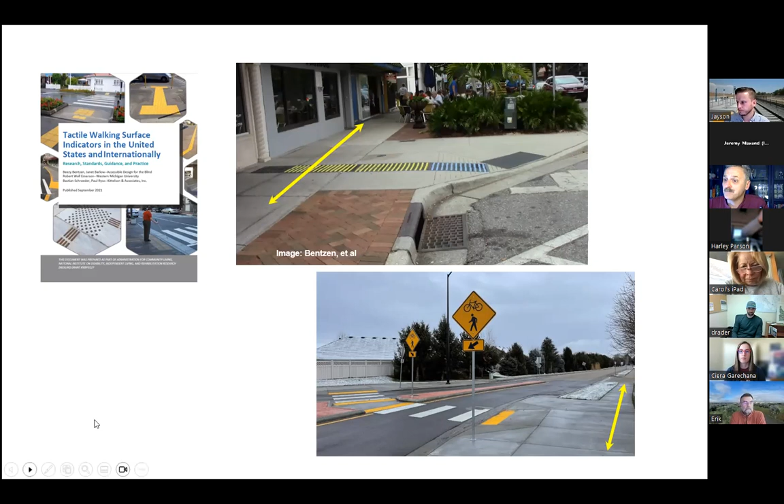Another example is in the application of diagonal curb ramps, where the truncated domes do not provide directionality and can orient people toward the middle of the intersection. And while these are meant to be a last resort application, they do exist for lots of reasons. As you can see, the application on the right in this example is orienting the bar tile so someone can stand on there and sense which direction they are to walk, instead of perhaps following a misguided cue from the truncated dome to go to the middle of the intersection.

And then finally, next slide, just all the application of NACTO and urban street design principles. There's a lot of these, including shared streets and what happened after COVID, that just simply aren't in PROWAG and the ADA standards, but we're realizing there's a need there. And this is a very recent project in the city of Boise, and thanks to the great folks at Ada County Highway District, CCDC, and the city of Boise, for putting these tactile strips out there and using them.

So if a person with a vision disability finds themselves off the sidewalk and into the bike lane, they still have a detectable cue to know when the end of that bike lane is occurring, so they don't get into traffic. So that's a little bit of where we are.

So, just trying to break it up into four different sections for you. We're going to talk about why tactile warning surface indicators are necessary, even though Don gave a pretty good intro as to why they are important. We're going to talk about the different surfaces, detectable warnings, TDIs and TWDs, and then finally just key factors to maintaining their functionality.

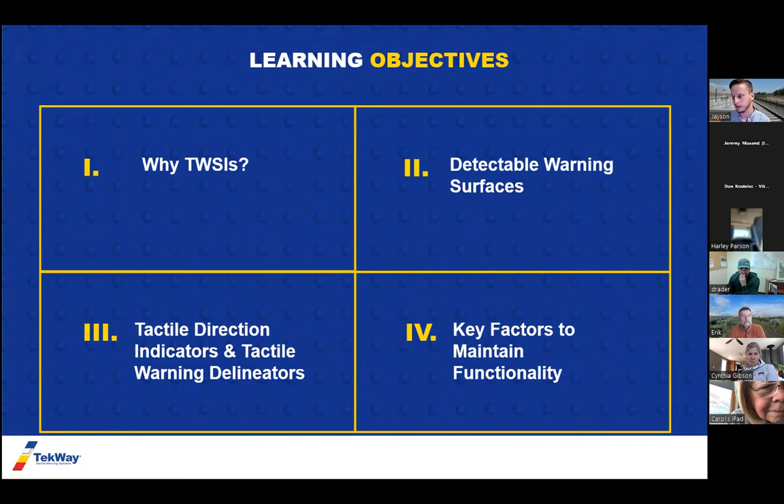So if we look at a definition given by Beezy Bentzen, and we work a lot with them - Don was mentioning Janet Barlow - it's really because of their research, due to a lot of their research, that we actually exist as a company, because of all they've done to further these applications for this group of people. And so this definition is really, have to give credit to Beezy Bentzen.

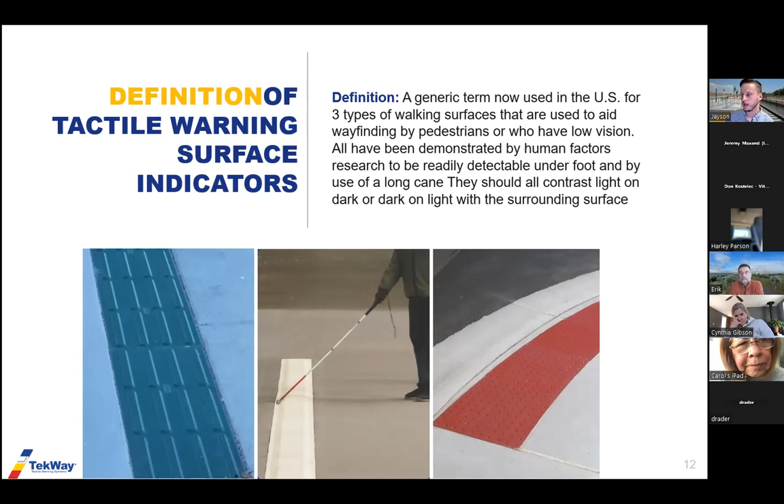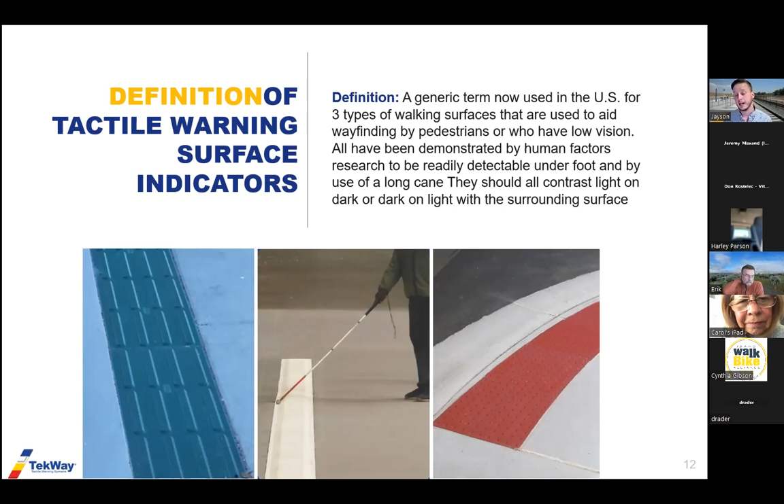So in general, TWSIs are three types of walking surfaces that are used to aid wayfinding by pedestrians who have low to no vision. They've all been researched and tested, and they have been found to be detectable and distinguishable, whether underfoot or by cane. Also importantly, they contrast in terms of color, whether it's a dark surface with a lighter sidewalk or vice versa, and not only that, but they contrast with each other.

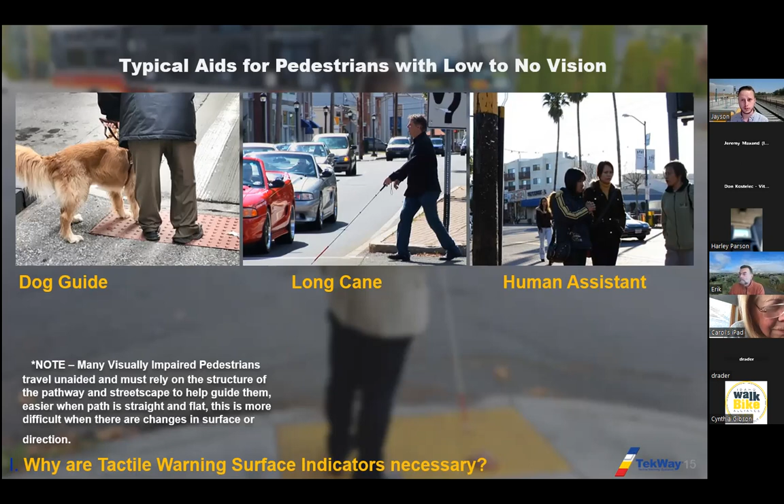A lot of pedestrians travel unaided, so they rely heavily on the structure of the street. I've heard many times that the sound of traffic acts as a borderline for someone who can't see. So if a path is straight, with a building line on one side and traffic on the other, continuously straight, that's easier to navigate. It's when you have changes of direction or surface changes that things become difficult to navigate.

When pedestrians with visual impairments are traveling, they're not always familiar with where they're going, and they often travel independently. There might be unfamiliar destinations, just like you or I going shopping in a new place, or taking our family to a different park - same rules apply. They have to navigate different streets, intersections, and crossings, and that unfamiliarity, especially when signals aren't consistent, creates potential hazards.

The general layout of the street can help sometimes, but it can also be confusing, like that roundabout that Don was showing. When things aren't clear and are also unfamiliar, something that hasn't been traversed before, that creates a potential hazard.

When we're talking about creating tactile warning surface indicators for these pedestrians, TekWay in particular goes by two standards from the ADA. Number one, Title II, talking about how we shouldn't discriminate against anybody that has a disability. We take that a step further to mean this needs to be in operable working order, and it needs to be focused on the highest level of accessibility possible to not discriminate against these people, so they have an equal chance to traverse safely.

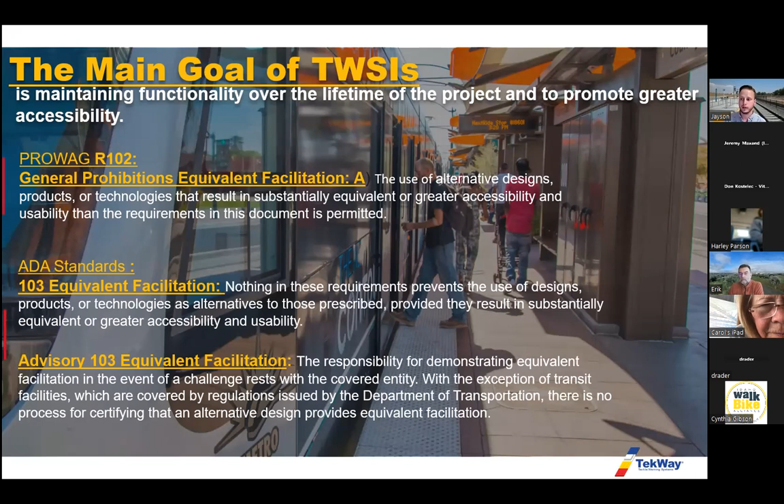All of these things are telling us that we, in whatever local community we are in, have the responsibility to go for greater accessibility.

When we're talking about tactile warning surface indicators, it's not just anything. We can't just look at something and say, hey, that surface is different from that surface. It must be sufficient enough to be a detectable warning or tactile direction indicator, because a lot of these surfaces, when felt underfoot or by cane, actually feel the same.

When we're talking about all this, it's almost like you need to be able to speak Spanish when English is the mainstream. It's a whole different language when we're talking about tactile warning surface indicators. It's important to realize, okay, what's the message we're sending to this person? And is that message consistent across the board? It's not just one person's opinion who may have some sort of vision impairment, and you go by that.

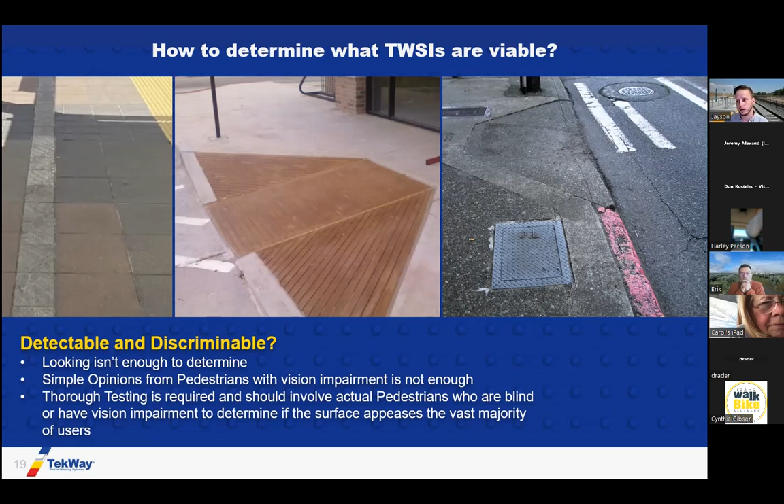It's thorough testing, making sure that across the board—and I've heard Beezy Bentzen quantify 90% as the metric—most people, most of the time, that's what we're going for. Not just one person's opinion, not just somebody saying that looks like it will work, but actually thoroughly vetting whatever you're wanting to use as a tactile warning surface indicator.

So some factors to remember for positive tactile warning surface indicators—those that have been tested and vetted: there's enough spacing between the devices, so you're not slapping them together and really confusing somebody. It's the equivalent of multiple people shouting at the same time. The raised elements are sufficient to be detectable, but not to be a hazard. And there's adequate width—we'll talk about that a little later—basically so that there's enough of the device installed that somebody doesn't step over it or miss it completely.

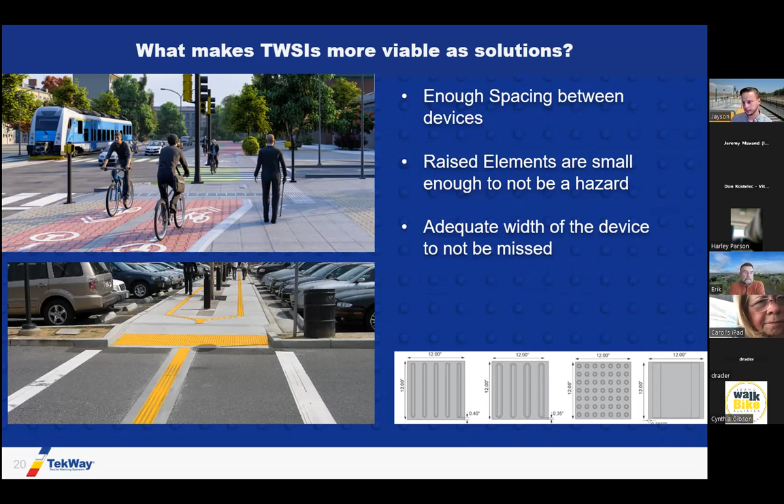When you're looking at the various tactile warning surface indicators, there are three things to remember if you're putting these down or trying to figure out what to use. Your device—making sure that what you're putting down is detectable. There are three main devices you can use, but there's not a whole lot of standards for this. So if you're thinking of experimenting or testing, make sure that whatever you're putting down is detectable and has been tested to be detectable by foot or cane.

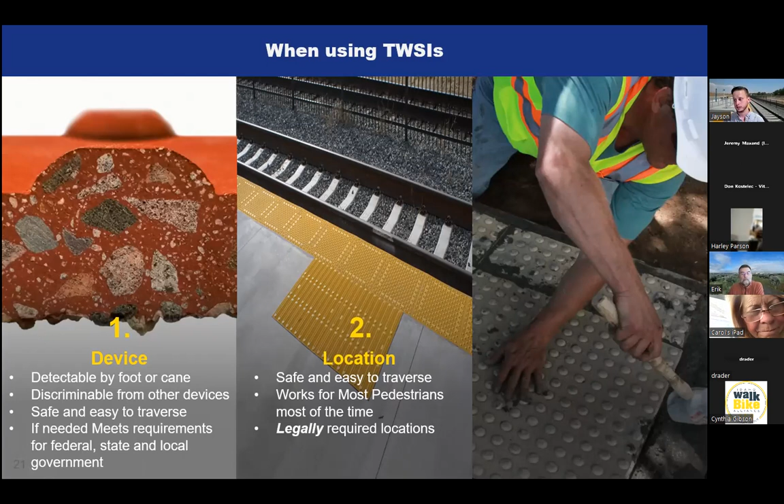It's discriminable from other devices. It's safe and easy to traverse, and if it needs to, that it meets federal, state, and local requirements. You want to make sure it's in the right location—again, safe and easy to traverse, and the legally required location. You're not putting it in the middle of an intersection where nobody's going to go, causing issues. Also make sure that whatever installation method you use ensures that however long you want it to be there, it will not deteriorate, so that it's functional and maintains an operable working condition so it will function over time.

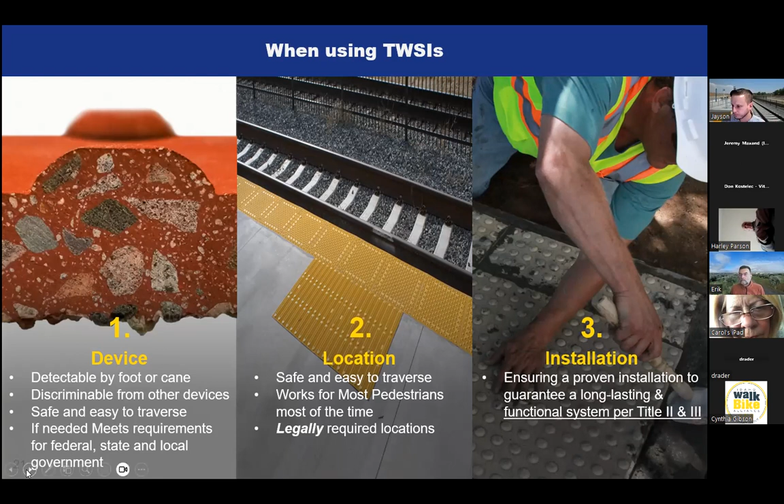So the TWSI that we're probably most familiar with, and the one that has the most standards behind it, are detectable warning surfaces.

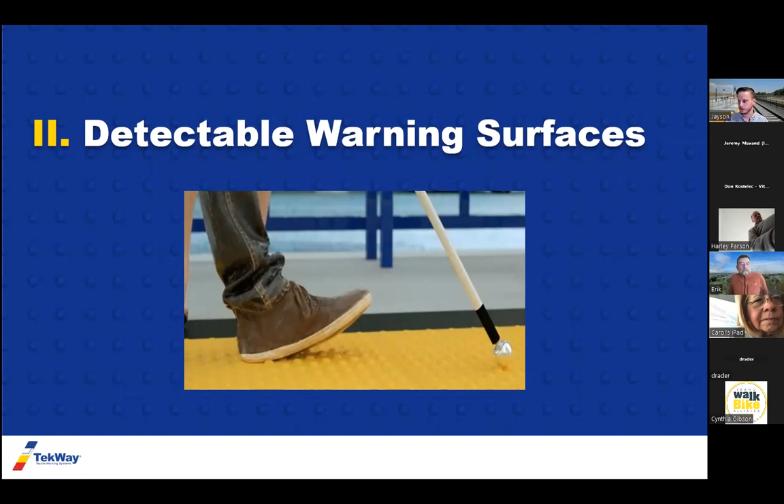A lot of these definitions are courtesy of Accessible Design for the Blind and also just general ADA standards. Detectable warnings are a standardized surface in the 2010 ADAAG, comprised of truncated domes built in or applied to walking surfaces or other elements to warn of hazards on the circulation paths. They're required by DOT at curb ramps and the edge of boarding platforms. You can actually take that a step further—they're usually required in the public right-of-way, where any walkway crosses a vehicular way.

Wherever there's a sidewalk or pedestrian walkway that will intersect or run parallel to a vehicular walkway, and there's nothing to stop it, like no curbs, no bollards, nothing to indicate a change of pathway, you need something that indicates that for people who cannot see or cannot see well.

Taking it a step further, when somebody comes across this, it's supposed to function like a stop sign. They should think, okay, there's a hazard coming up, and I should really analyze where I'm at.

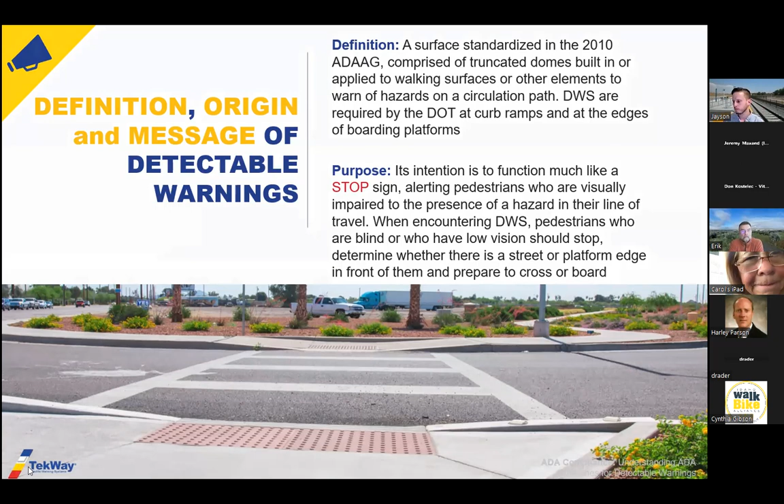Detectable warnings have the most standards behind them. This is the result of thorough testing. The ADA, Americans with Disabilities Act, came out around 1991, 1992, and it had detectable warnings in the standards, but they were actually suspended for a while to do more testing to figure out what was best for this function.

After many years of testing, in 2001 they were released again—or I should say the suspension expired, and so they started being used. In 2010, they were really standardized.

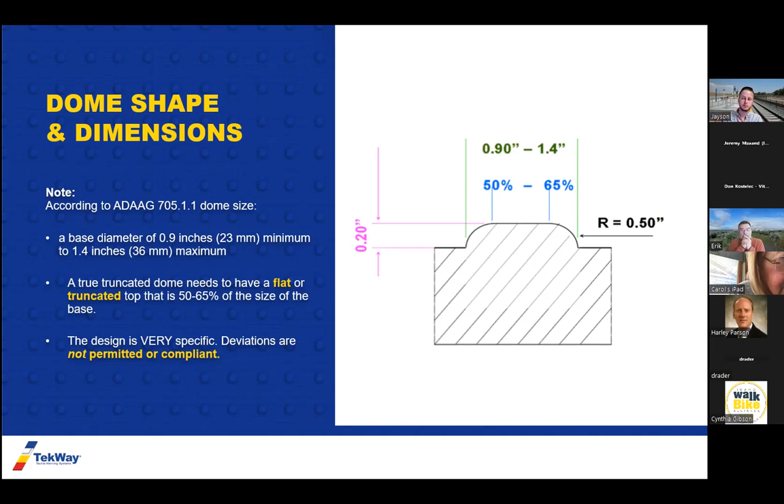The sizing and spacing of the detectable warnings is very, very specific. You've got 0.9 to 1.4 inches on the truncation, and it should be truncated on the top of that dome. It should only be 0.2 inches high, which is a pretty good metric for TWSIs—making sure it's a raised element to be detectable, but not too much to be a hazard.

More than that, you've got how far apart the domes need to be—like 1.6 spacing, center to center, dome to dome, up to 2.4. This sounds like a lot of boring regulation, but it's a result of thorough testing to ensure adequate spacing and a raised element enough to be detectable. It's important because it stops pedestrians from going out into the intersection, or at least makes them stop and orient—what's going on, where am I at this point?

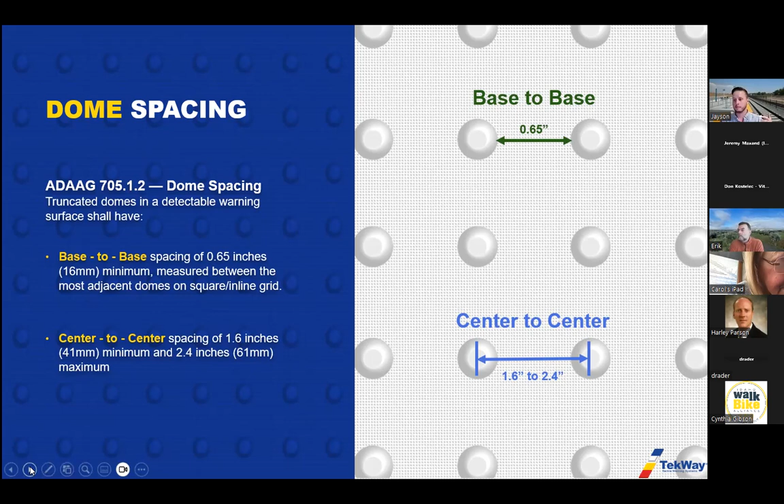Another important aspect that's federally mandated, somewhat vague, is dark on light, dark on light. General rule of thumb: you want to put a dark surface with lighter concrete, and vice versa. There were more specific standards, but it was hard to quantify those at different times of day, so the federal standards left those pretty vague.

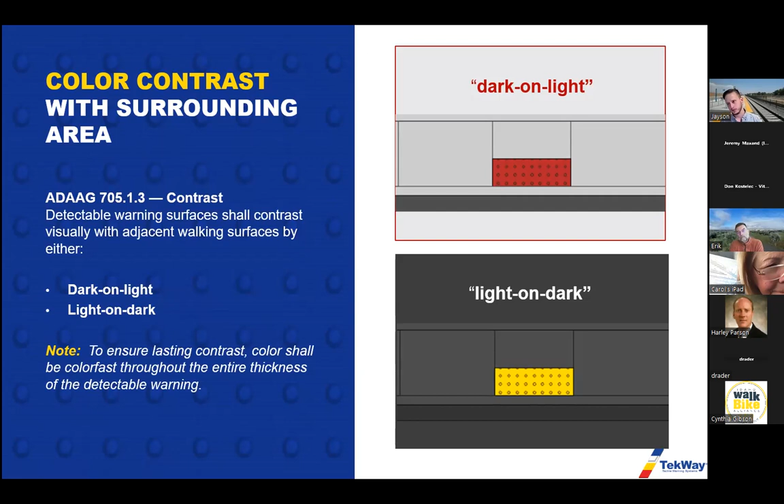Taking it a step further, California—Caltrans and the California Building Code—has a 70% contrasting ratio. If you take the actual light reflectance values of the material versus the sidewalk, you can determine that light on dark, dark on light ratio, and 70% is a pretty good metric. At different parts of the day it'll be a little different, but it's still a good benchmark to use.

Something to note: if you're using federal yellow, which is a pretty recognizable safety color, in order to ensure that contrast you probably don't want to put it on lighter concrete, or if you do, you want some sort of dark contrasting element between the material and the sidewalk. That applies to any of the applications we're talking about today—there needs to be contrast between the materials, because that's one of the last things people losing their vision will see: colors and contrast.

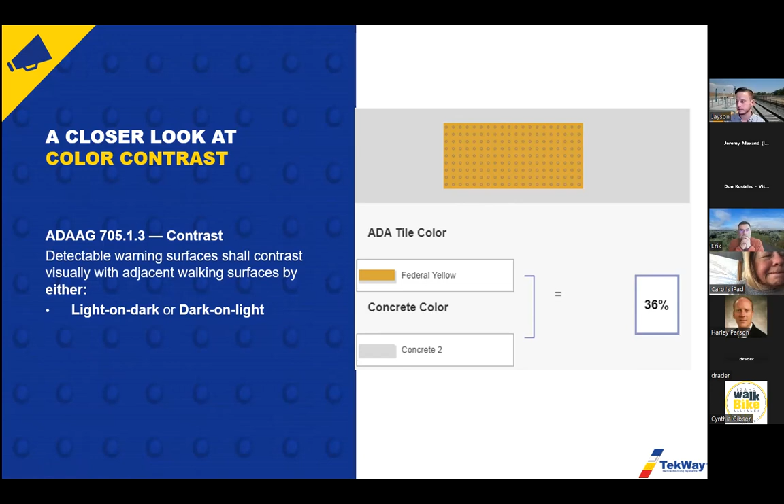You can see a difference here. With a lighter sidewalk, a federal yellow color only gets you about 36% contrast unless you do something to enhance it. Whereas a charcoal color or a dark red color will get you a much higher percentage. But you also need to think—is charcoal going to be considered like a hole? Because people can't see this very well. So color is super important when choosing what to use.

So please consider this. We also have a color contrast tool on our website you're welcome to use, or you can use your own—very important, especially if you're using multiple TWSI elements. These are just some examples of local jurisdictions using different colors, not necessarily federal yellow, that still get better contrast with the surrounding sidewalk.

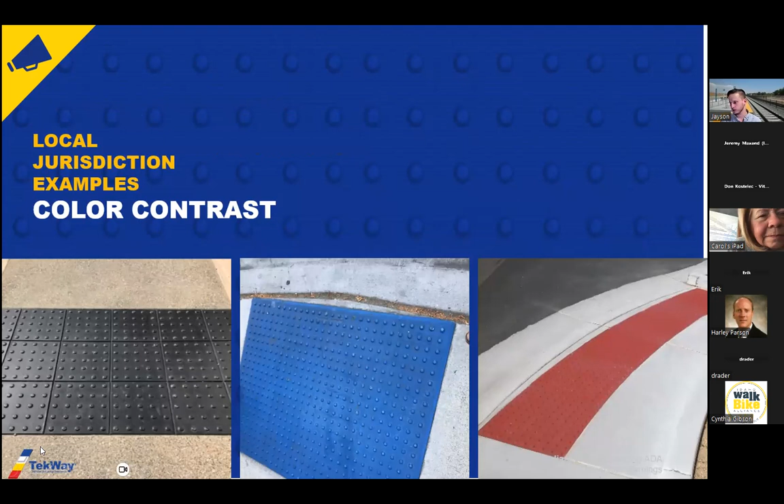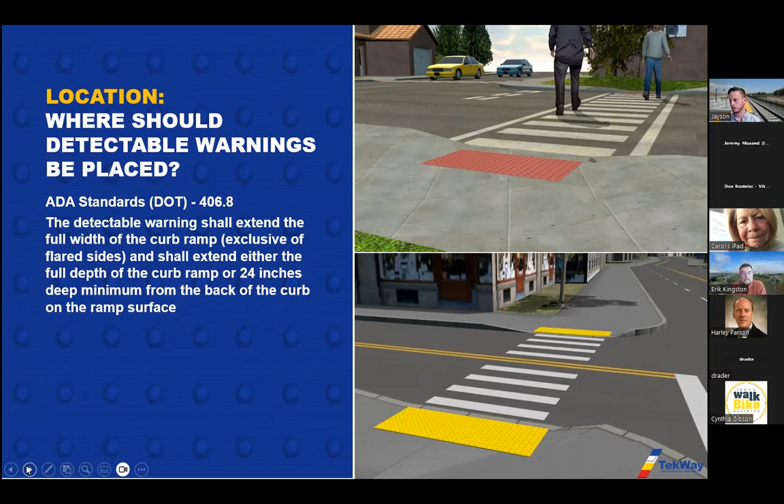We'll just keep going through these requirements because they do exist for detectable warnings. So in general, per the DOT, the detectable warnings, number one, need to extend full width of the curb ramp, but not the flared sides. And they need to be 24 inches deep in the direction of pedestrian travel. And again, that's just to make sure that they aren't missed. So 24 inches is considered the minimum acceptable depth. They can be longer than that or bigger than that, but 24 inches is the minimum when we're talking about curb ramps, or detectable warnings on these kind of surfaces, I should say.

Just more to my point earlier, there is an actual standard that says if it's not separated by some sort of element and it leads into a hazardous vehicular way, you need detectable warnings to be there. And two great examples are curb ramps, where obviously the sidewalk is becoming flush with the crosswalk, and transit platforms, where at the platform edge there's nothing to stop somebody from walking right off.

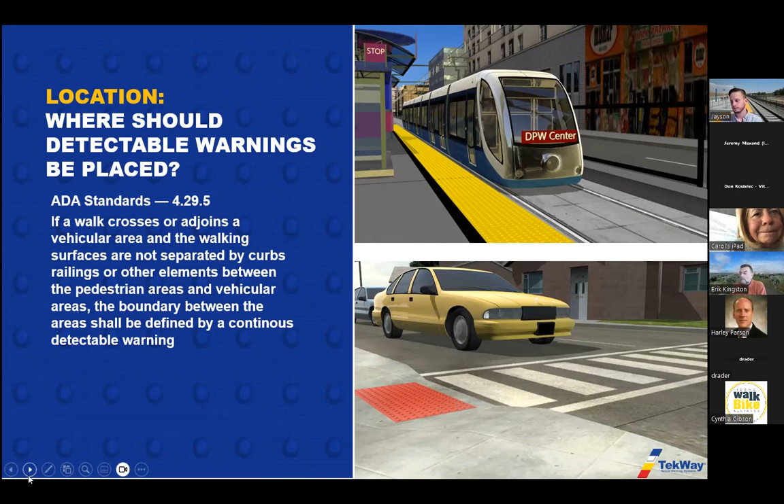So kind of like what we reviewed in those earlier standards, when it comes to color or spacing, things like that, the federal government is going to offer its minimum guidelines. Sometimes the state takes an extra step, sometimes it doesn't. Like if you're going to Texas, they mirror the federal standards. If you're going to California, they take it a lot of steps further. But it really is up to the local jurisdiction.

And a big reason for that is because of what's best in your communities: what colors are going to be best for the environment, what spacing is going to be best, say, for somebody in a wheelchair, to make a compromise for that group with the visually impaired pedestrians. So it usually rests with the local jurisdiction. Of course, if it's a state project or a federally funded project, that's a little different.

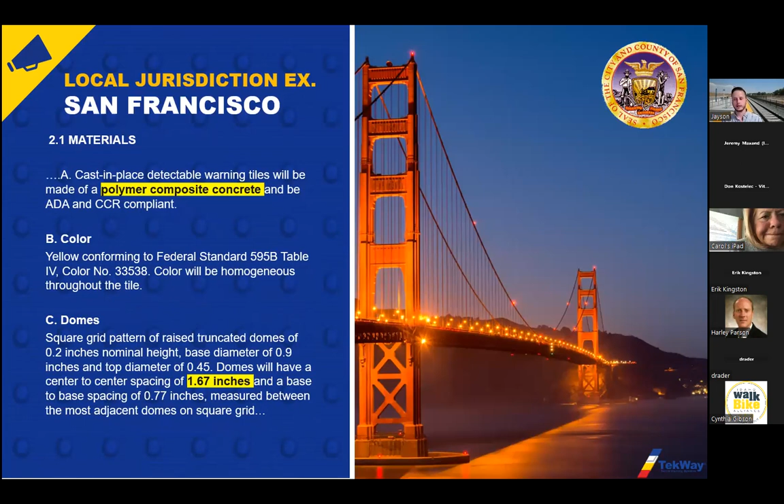An example of that is the city of San Francisco. They actually have performance specifications embedded into their projects where they talk about using a specific material, polymer composite concrete. They like to use federal yellow, but they also darken the pigments of their curb ramps to enhance that color. And Caltrans actually specifies a 1.6 to 2.4 spacing from the center of one dome to the other. They take it a step further to be 1.67, so closer together to ensure detectability.

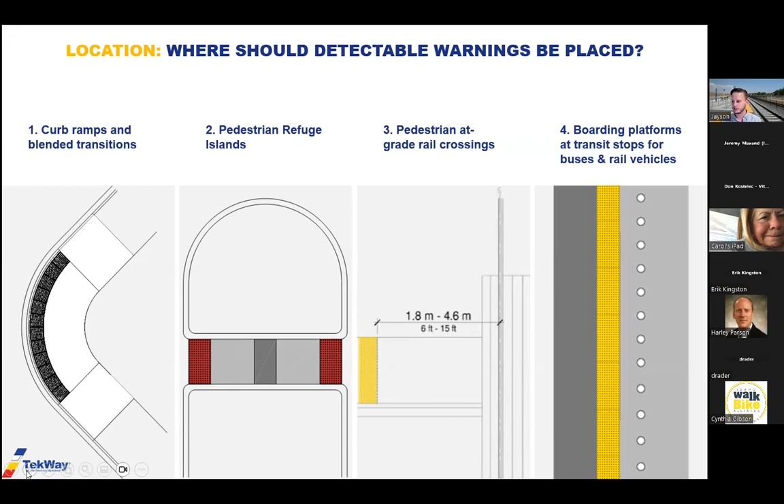These are just some examples of different places where you're going to see detectable warnings, a lot of which you're probably familiar with, like curb ramps or blended transitions, crosswalks that go across a rail line, or boarding platforms, things like that. And again, I know I'm kind of blazing through all these, so if anybody has questions, please let me know.

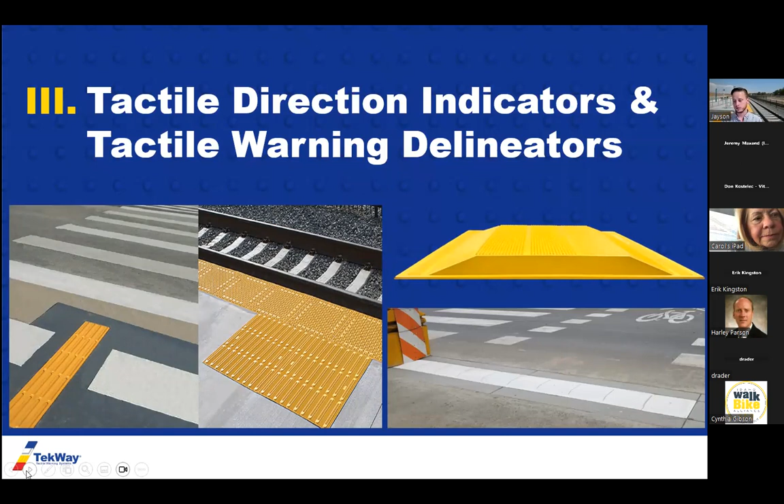Okay, so next we're going over to tactile direction indicators and tactile warning delineators. There are a lot fewer standards given for these, and in reality, there's not actually a solid federal standard. And so a lot of these things come down to the studies that have been done for them, how they've been used elsewhere, and just overall best practices.

So when we're talking about tactile direction indicators, again, courtesy of Accessible Design for the Blind, it's a surface comprised of raised, parallel, flat-top, elongated bars indicating an unobstructed path of travel where there are no natural guidelines such as edges of sidewalks, walls, or curbs, and where other directional cues such as traffic may be missing. So these are not meant to be a stop sign. They're meant to say you can continue on this safely. There's nothing to stop your path from going forward until you feel another cue or signal.

So they're really meant for aligning, like you saw with Don's picture, to make sure that you're going in the right direction, or a long-term wayfinding tool that you can follow on either side without any danger of a vehicular way coming up. So it's very important to understand that these are not meant to be a border. They're not to indicate danger. They're quite the opposite, to indicate safety. So if you proceed in this direction, you will be okay. So it's very important that that message doesn't get miscommunicated and they don't act as a border, as in if you go over this line, you're going to be in a vehicular way, because that's the wrong message.

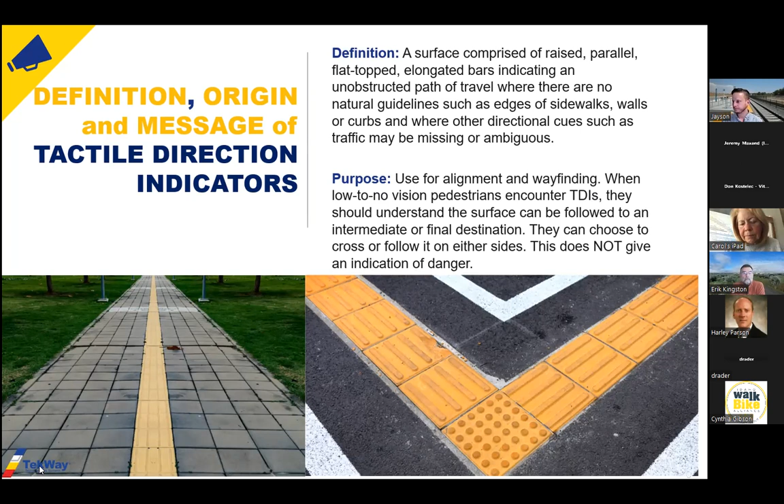Again, those bars, back to that 0.2 inches, it's not too high of an element to be a hazard, but it's enough to be detectable. And again, this is from thorough testing done not only in the US, but also in different parts of the world, and most especially in Europe and Japan, where they have used these in tandem with detectable warnings for many, many decades.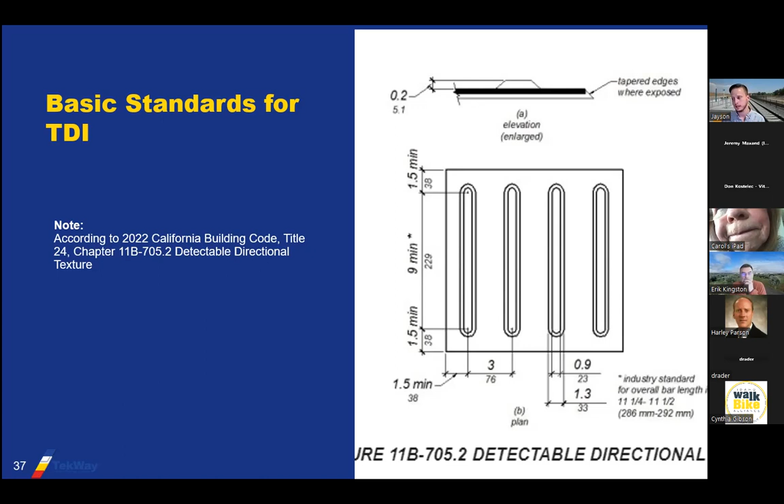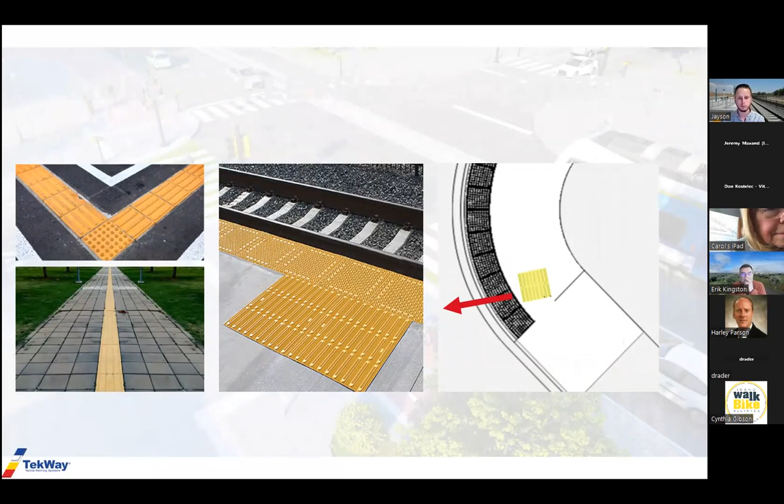So the 3 main scenarios that you'll see with tactile direction indicators are, number 1, guiding along a path as a wayfinding tool. So again, an elongated path where you're safe on both sides. You'll see them as an indicator of where to board or disembark on a vehicle, because you'll have those detectable warnings along the whole platform, but they don't necessarily indicate where you need to get on or off. So that's why on elongated transit stops, it's important to have that element so you know where the door is.

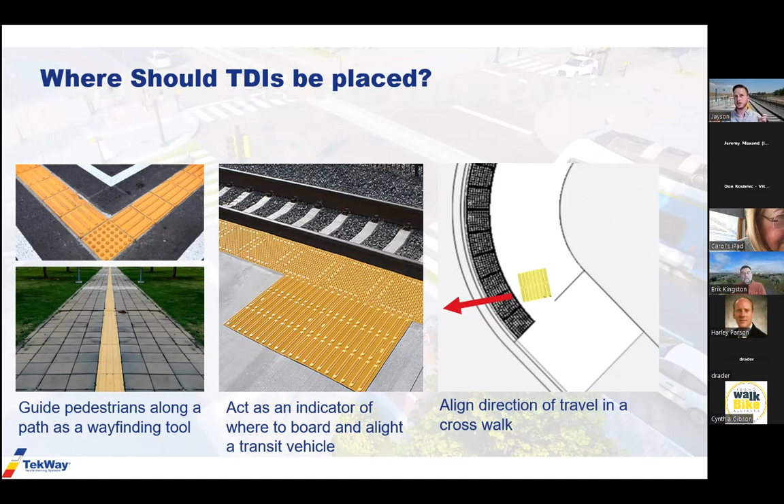Or like you saw with Don's picture, it aligns the direction of travel, because you can see on this, especially on radius installations, or just in general, detectable warnings, I have been told, are not exactly the best indicator of orientation. So, you step on a detectable warning with a bunch of those domes, it doesn't necessarily give you the best indication of what direction you're going.

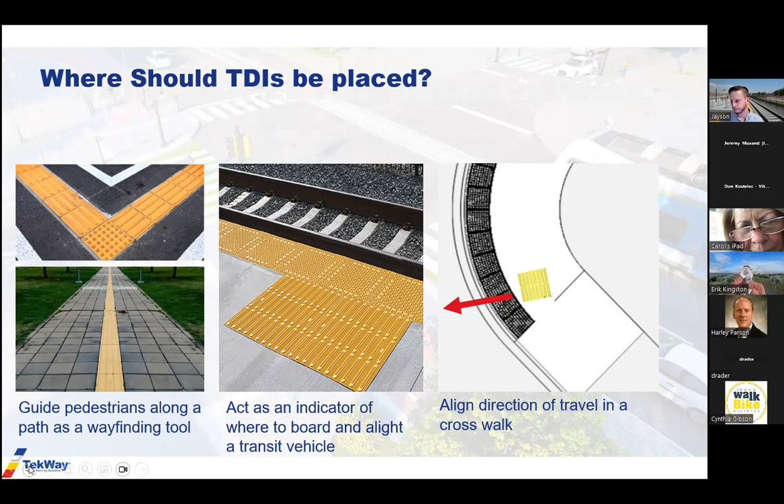So these help by offering a clear message. That's the way to cross the street. Don't go this way or this way, because we know the detectable warnings are there, but that's where you need to cross when you're not in danger. And that's just the big thing that you need to remember with these different TWSIs. Detectable warnings are a stop sign. These bars are direction indicators, or indicators of directional safety, I should say.

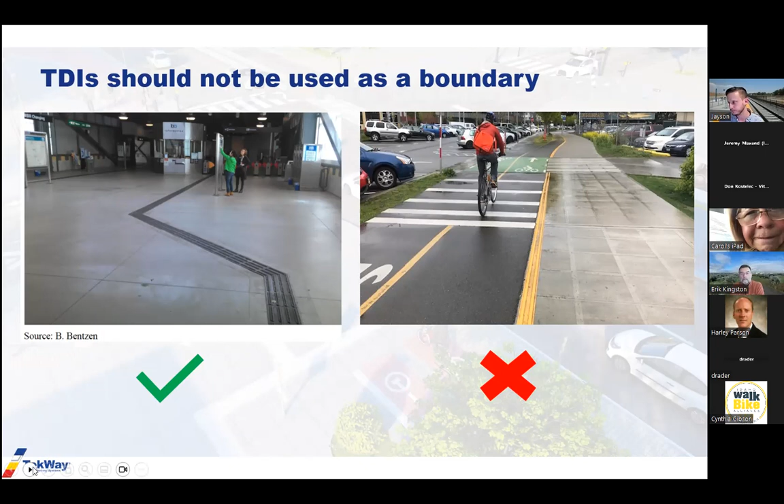Okay, so moving on, these are relatively new in the last probably 3 or 4 years, tactile warning delineators. So they're a little hard to see in these pictures, but it's this element by the bike and on the left side of this gentleman here. So it's a raised linear surface. It's a trapezoid shape as far as the cross section, and it delineates the boundary between a sidewalk and a separated bike lane. Basically where you see shared zones, either a bike path or a vehicular path on the other side.

So in contrast to the tactile direction indicators, this does act like a border. You're not necessarily supposed to cross it. It can be if needed, say if somebody in a wheelchair needs to, or a scooter or some kind of wheeled vehicle needs to get over it. But in general, it's not meant to be crossed. It is indicating that you are at the same level as a hazardous path that you're running parallel along. And the ideal situation would be when it's safe to cross, there would be another tactile signal that would indicate that.

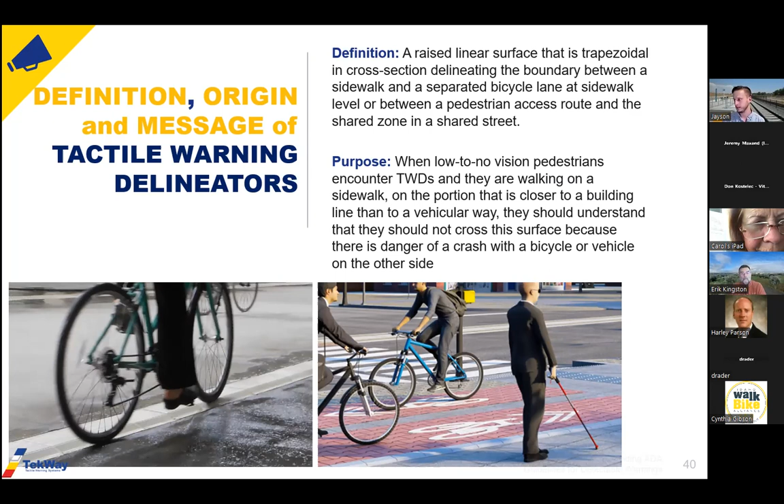So the background of these is there was a study conducted in the city and county of San Francisco, and this kind of goes back to what we were saying, like you can't just throw out TWSIs willy-nilly. They have to be studied and vetted, and they have to work for most people most of the time. So in 2019, this study was headed up by the city and county of San Francisco, really in relation to their Better Market Street project.

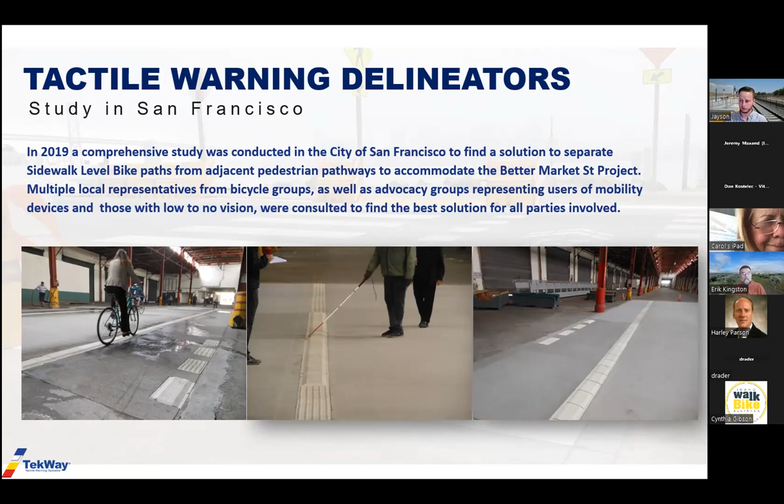A lot of local advocates were worked with on this project, including Beezy's group, the Accessible Design for the Blind, also the Lighthouse for the Blind in San Francisco, the bike groups, the mobility impaired groups. So a lot of different participants here, a good period for study. And we had the privilege of working with them on this just because we have been working with the city of San Francisco and the Lighthouse for the Blind for a long time.

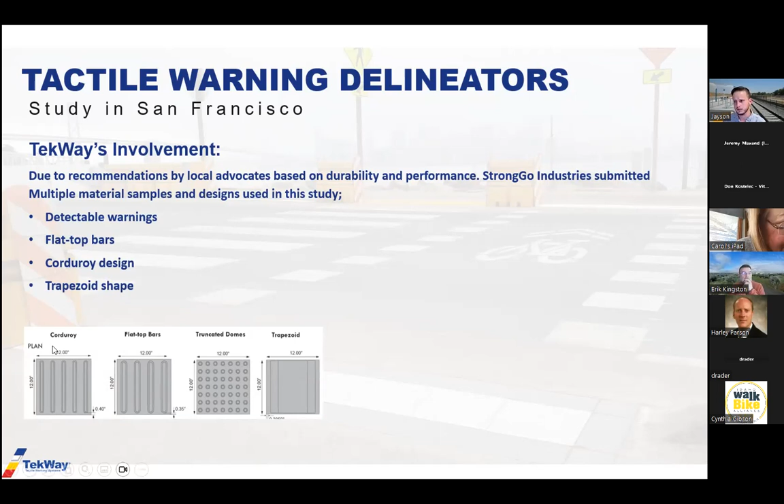And they tested 4 different surfaces to basically find a solution to what I was just saying, the bike path or the shared use path, to act as a significant border that wasn't confusing with another device. So they did test the bars that you saw before, the truncated domes, this corduroy on the left, which is a design I believe is used in Europe, and the trapezoid.

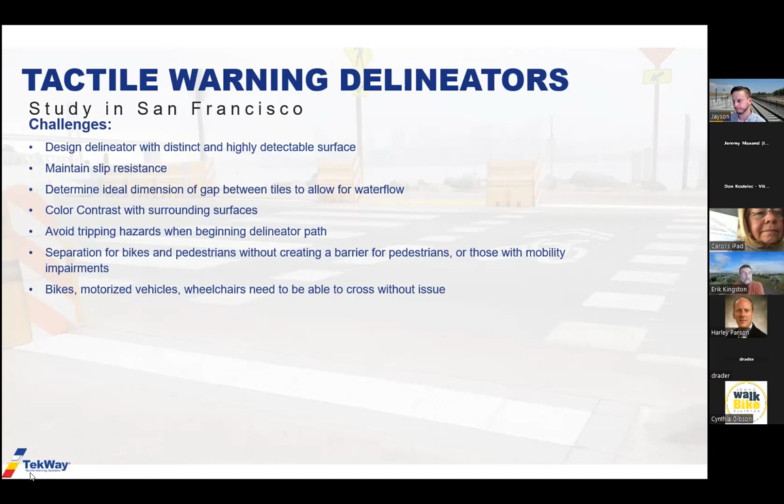So, like I said, a lot of different entities were involved, a lot of advocacy groups with different circumstances, either with guide dogs, canes, sighted assistants, and different departments from the City and County of San Francisco were consulted in this. And they needed something that was detectable, that was distinct, that still had slip resistance, that was an ideal dimension for water flow, things like that, color contrast, a robust enough separator within that limited real estate between the bike path and pedestrian path. And, like I said, wheeled vehicles had to be able to cross over it.

So they did a couple different tests. And again, the only reason I'm going over all this is to show you the level of thoroughness that is involved with using a new device for a new application. There's a lot of vetting. It can't just be done willy-nilly and just say, okay, this is a different thing, it'll work. It has to be proven.

So they did a detection test, an identification test, a following task, and a crossing task. And you can see here, there were different elements of that: detecting the surface, making sure they can identify it from different angles, following the delineators along a long path, and then also crossing over them.

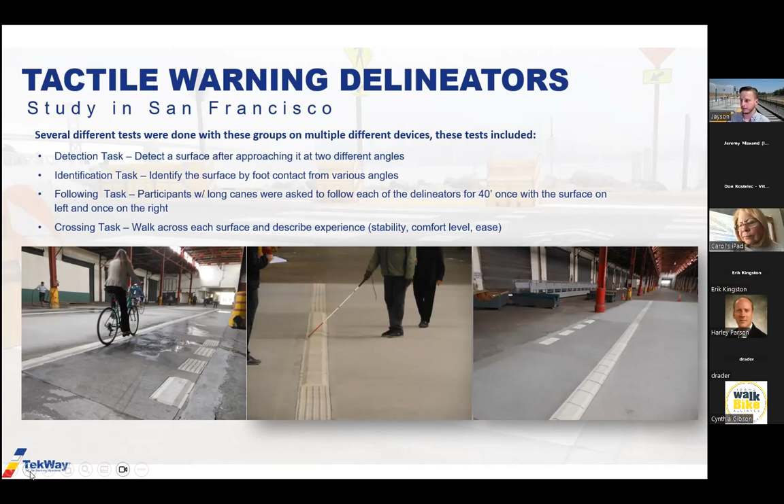So from there, the trapezoid here, and just for the sake of understanding this, oh, sorry. Go back. Right. Okay.

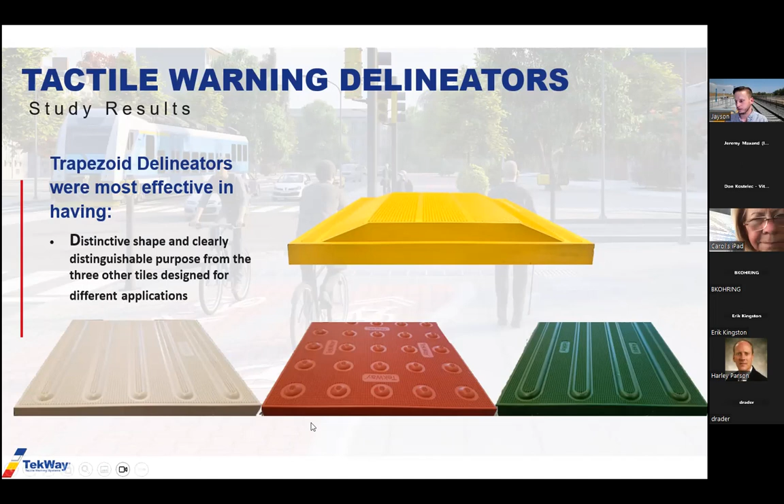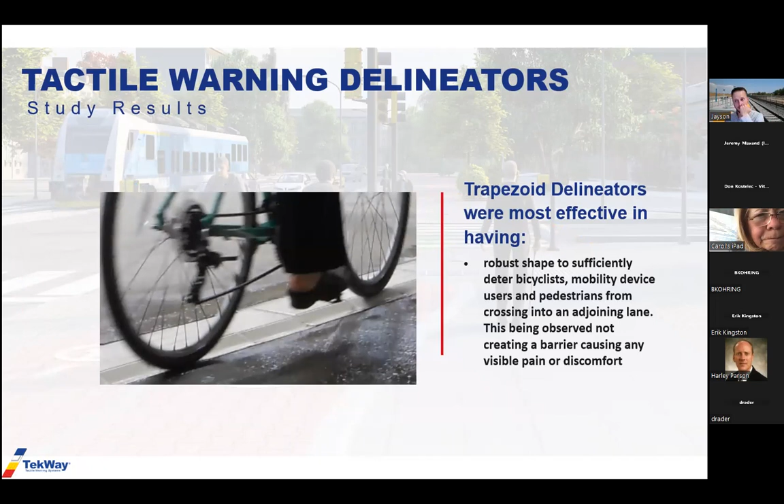For the sake of understanding the trapezoid here, you'll only see the trapezoid shape that's actually going to be above the surface. There's probably about 3/4 of an inch that's embedded in concrete. And that was the specific one that was used for San Francisco, but it was found to have a distinctive shape, different than the other devices that are used. And that shape was robust enough to act sufficiently as a border to say bikes can feel this and know not to cross over it, and vice versa, pedestrians can feel this and know not to cross over into the bike lane.

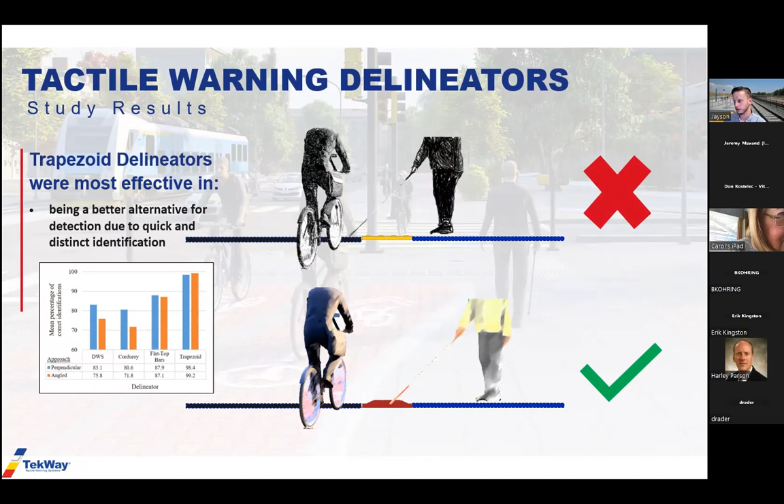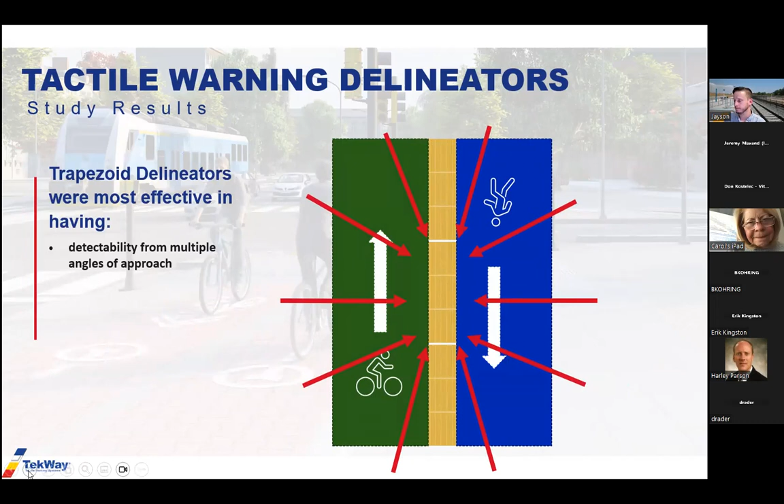Overall, they were better, and that's an actual statistic from the study that I included in there. They were better for detection, and quick detection when you're talking about 12 inches wide is very important so that you don't get cane intrusions into the bike lane, which can cause collisions or hazards. They were also found most effective in having detectability for multiple angles of approach, so different ways of coming at those delineators from different sides.

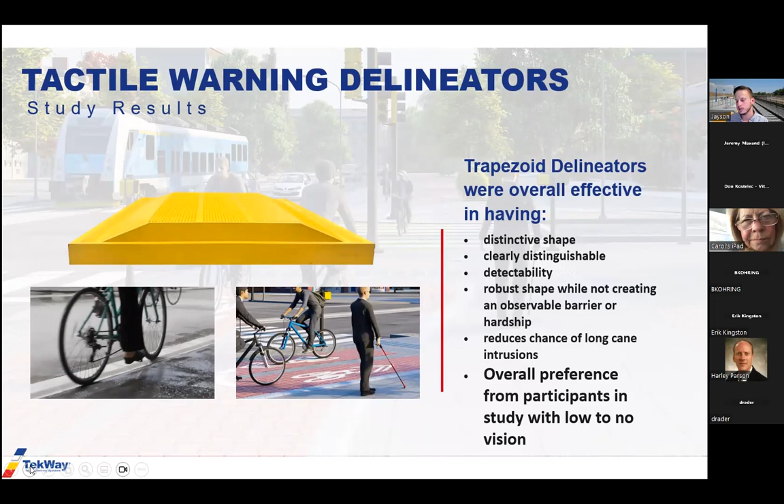And overall, among the participants that had visual impairments, the trapezoids were preferred for their distinctive shape and their detectability between all the devices, and being specifically for this purpose, that's how the trapezoids were chosen.

And these are a few more measurements for you, so you can see the finite exactness attached to a tactile warning surface indicator. These measurements are very exact, like the detectable warnings and the bars, because that's what's been proven to be detectable and distinguishable. And just like the bars and the detectable warnings, they all come in different sizes, colors, and applications. I only included the delineators here because they are a relatively new device, so you can get an idea of how they can be used, whether on a really long bike path or whether you have to break them up for streetscape elements.

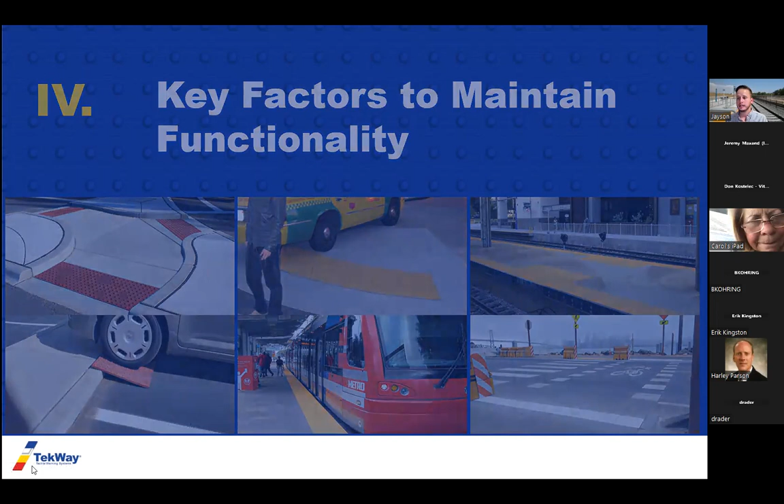Okay. So now that we've covered the different TWSIs, I wanted to talk about maintaining their functionality. Going back to the beginning when we were talking about how these need to be in operable working condition, you need to consider, when you're either working with or installing TWSIs, what are they going to have to come against to be successful? Because again, these aren't light bulbs or doorknobs or nails that you throw in at the end of a project. These are federally mandated, and if not mandated, then important for this community of pedestrians so that they can travel safely. So in order to make sure that they can be in working condition, you have to consider these critical points.

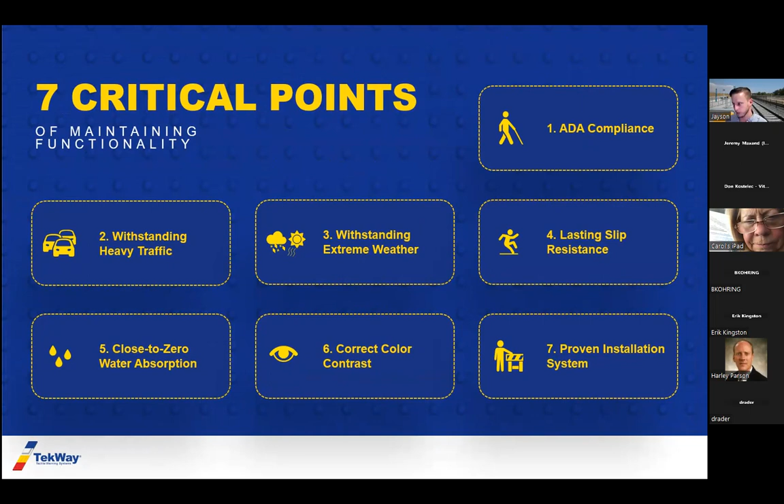First of which being ADA compliance. For those materials that are compliant, or if there's any general compliance standards for them, it's important to know that and to abide by that, because obviously that's what's required to put them in. So, going back to shape, dimension, spacing, color contrast, placing them in the right location, and maintaining functionality.

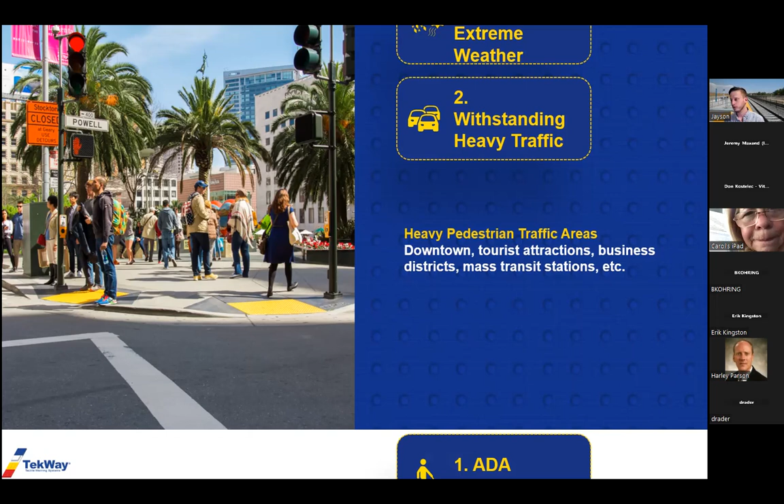These elements are usually outside all the time, having to deal with pedestrian traffic. That doesn't seem like a whole lot, but when you consider places that are in tourist attractions, hospitals, universities, well-traveled areas, you're going to see not only foot traffic, but you're also going to see vehicular traffic. You'll often see these in flush transitions from sidewalk to vehicular way, kind of like here, where a bus is parked over them. They need to be able to withstand those kind of things and repeatedly withstand them over time. Otherwise, they're not going to be in operable working condition.

And so it's not only doing a disservice to the visually impaired community, but as the owner of the project or the jurisdiction, you're coming into liability issues and things to consider if these aren't continually working.

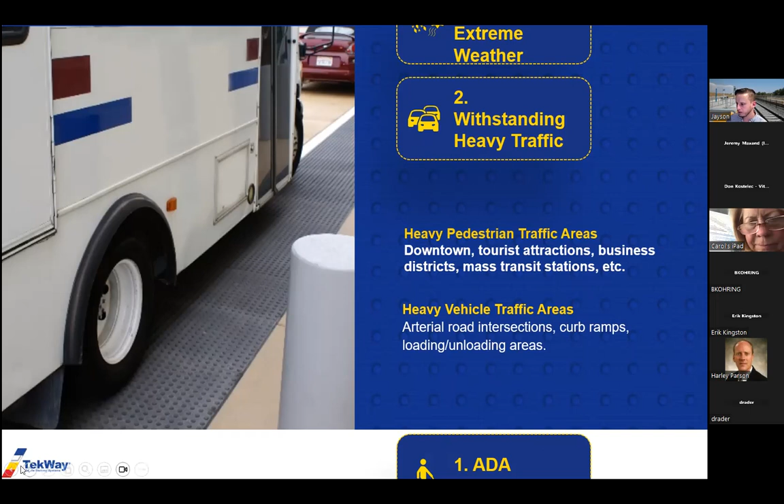Again, these are outside all the time. Unless you're talking about, say, in LA Metro, the tactile direction indicators, most of the time these different devices are going to be outside. So the local climate is something to consider. Like in Arizona, we have heat all the time, never stops. And it's not only the heat, but it's the constant ultraviolet exposure. It needs to be able to retain its color contrast. It needs to be able to stay solid with temperature swings.

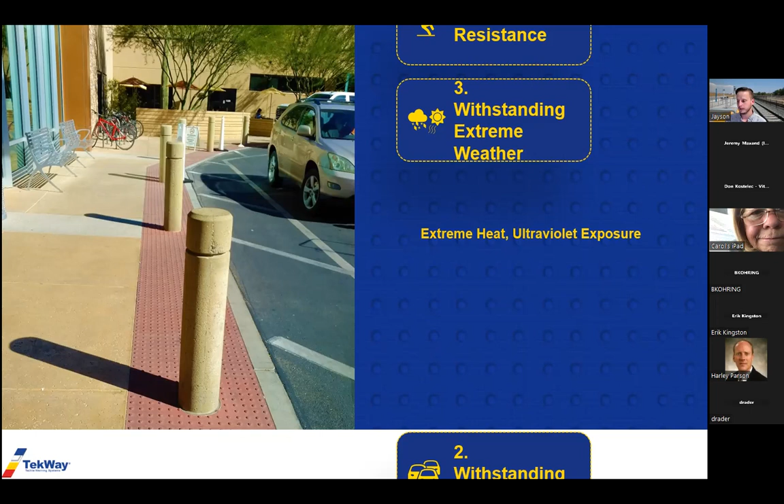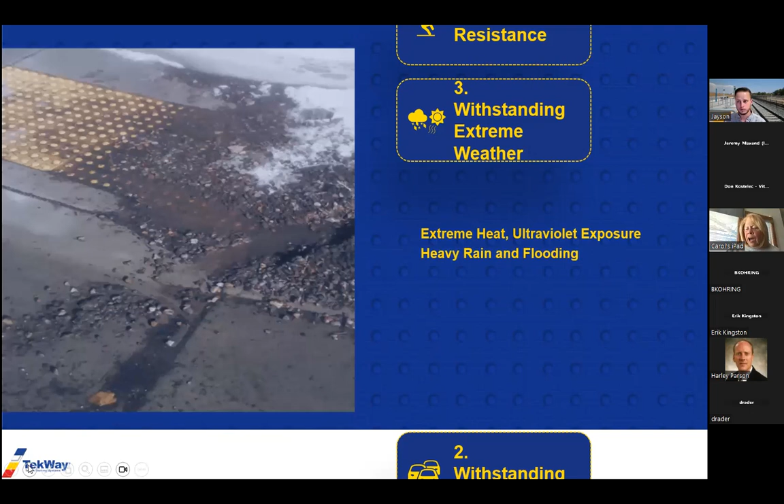All of those things are important if you're in a place that has a lot of moisture, flooding, heavy rain. Don't know how much snow everybody gets in their different parts of the country, but that's also something else to consider. It's freeze thaw conditions and snow, making sure that they can withstand the effects of inclement weather.

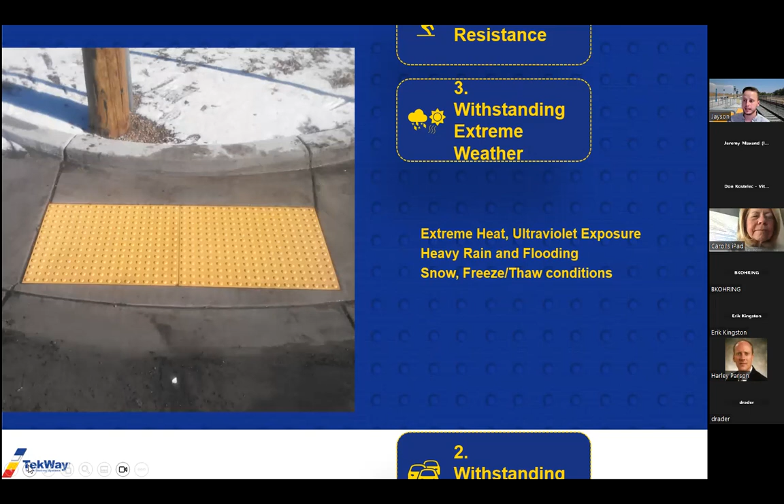Lasting slip resistance is not only something to consider to serve a pedestrian who has vision impairments, but just overall, because other people are going to be walking in this right of way as well. It takes up the whole curb ramp, exclusive of the flared sides, and goes into the crosswalk. So it needs to have lasting slip resistance. Otherwise, you're going to encounter hazards.

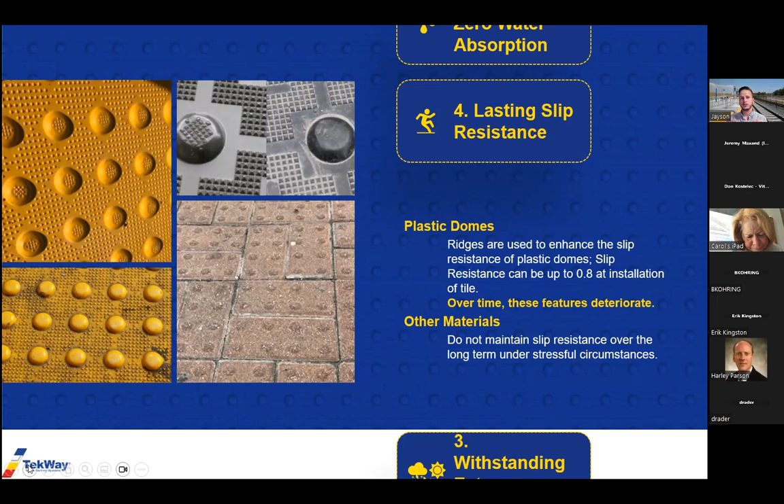So it's just something to consider, things like plastic that are naturally slippery. They have different nubs, for lack of a better term, that are put onto them. And once they wear off, they become a slippery surface. Other materials also soak up the water that they use, and they deteriorate. So that slip resistance kind of goes out the window as well. And just in general, you're trying to maintain the raised element of these different devices so that they can be detectable.

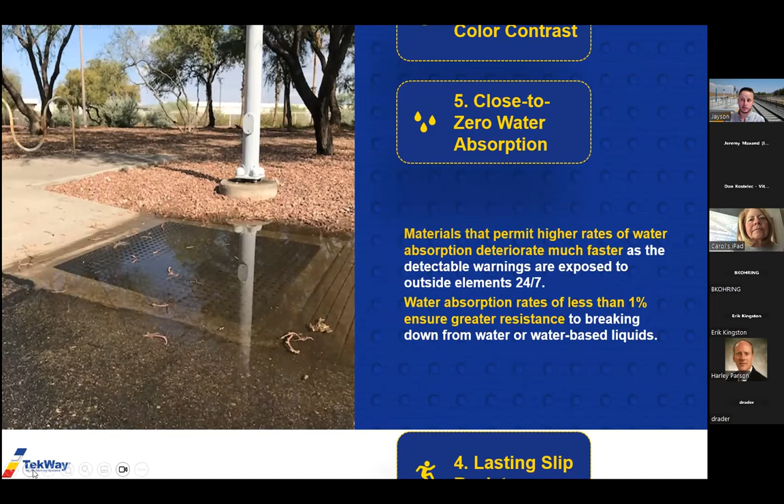So that brings us into the next one, having low water absorption. So making sure that whatever device you're using doesn't soak up the water, because if it has a sponge, that water is going to break it down. And also the installation, the substrate underneath, that can't soak up water either. Otherwise, the whole device is going to break down.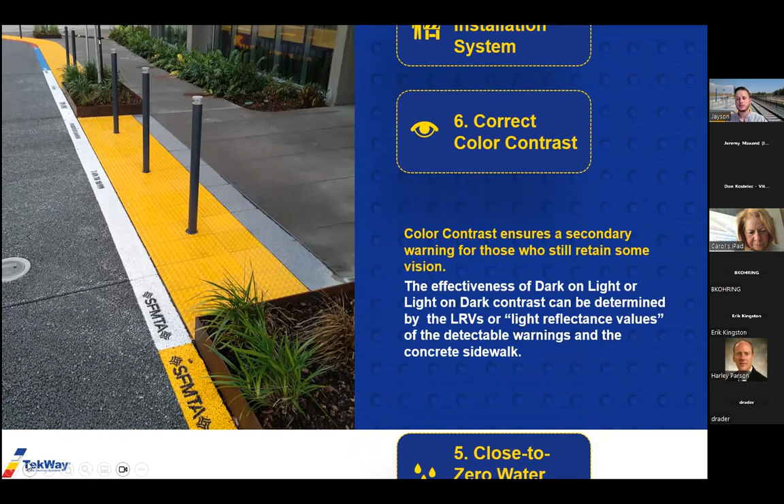Covered color contrast already, but it's, again, a big point to consider with whatever you're putting down. It needs to not only differentiate itself from the surrounding surface, but also from any other elements that you're putting in. Like if you're putting a detectable warning surface next to a tactile direction indicator, that needs to be separated.

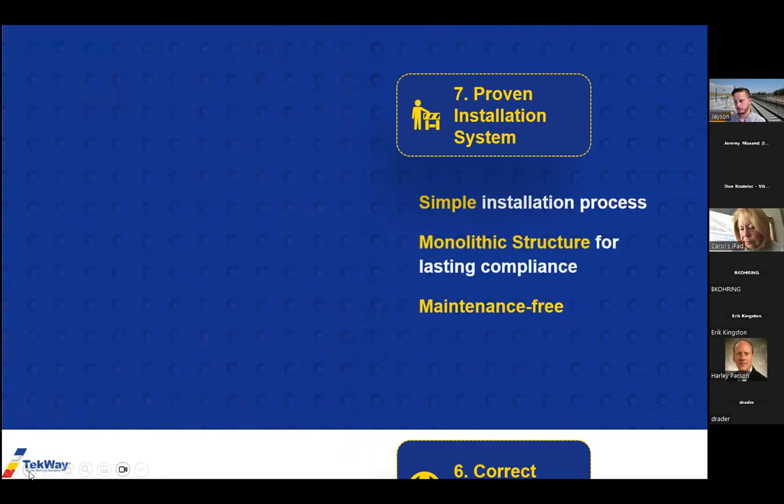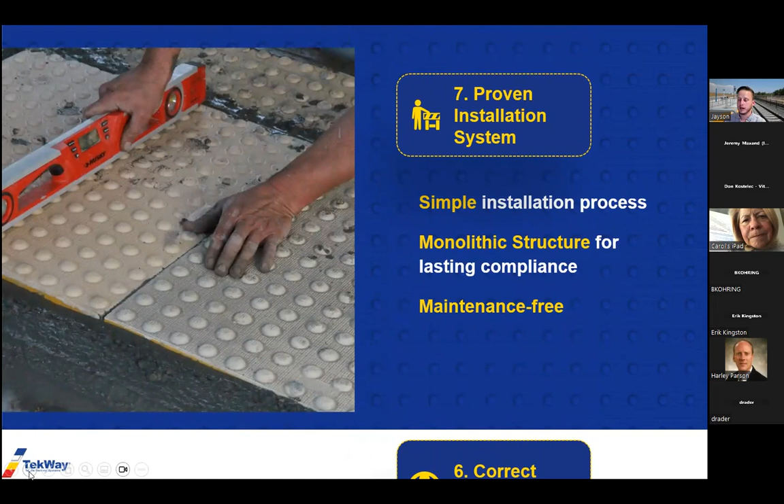You need to make sure that you have a proven installation process throughout this, something that is simple. Ideally, you want something that's going to create a solid monolithic structure. So something that can really support the device above and is as maintenance free as possible. I mean, we live in a world where I can say that, but it doesn't always happen. But you want it to be the least amount of maintenance possible so that it can maintain itself in operable working condition.

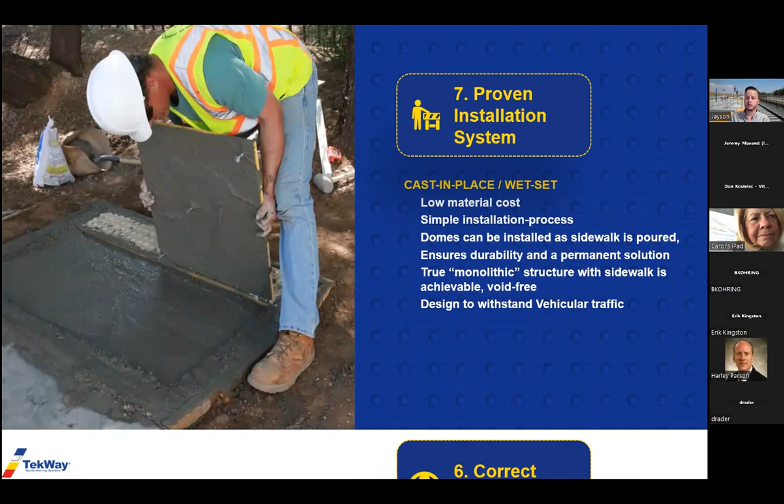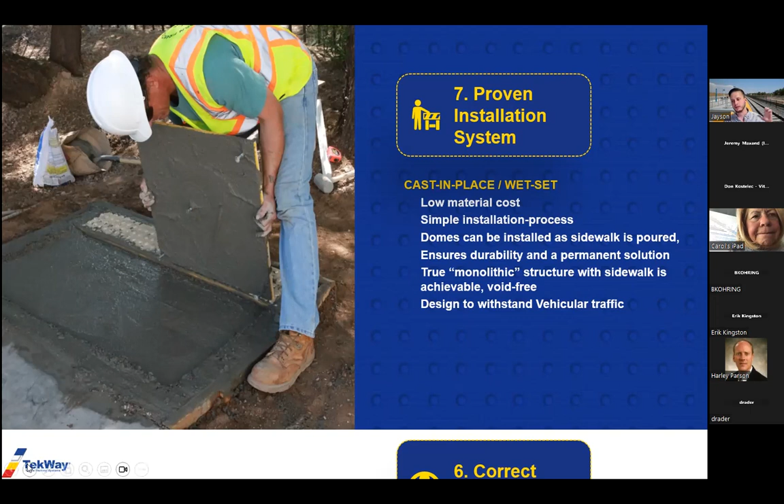A proven installation that we've seen in our experience is one that ensures a monolithic installation. The wet set or cast-in-place installation method can do this, and you can use it with most, if not all, of these tactile warning surface indicators. With a low material cost and simple installation process, the domes or whatever device you're using can be installed as the sidewalk is poured. This really ensures a durable and permanent solution because you can create that support structure underneath the device, which is designed to withstand heavy vehicle and pedestrian traffic.

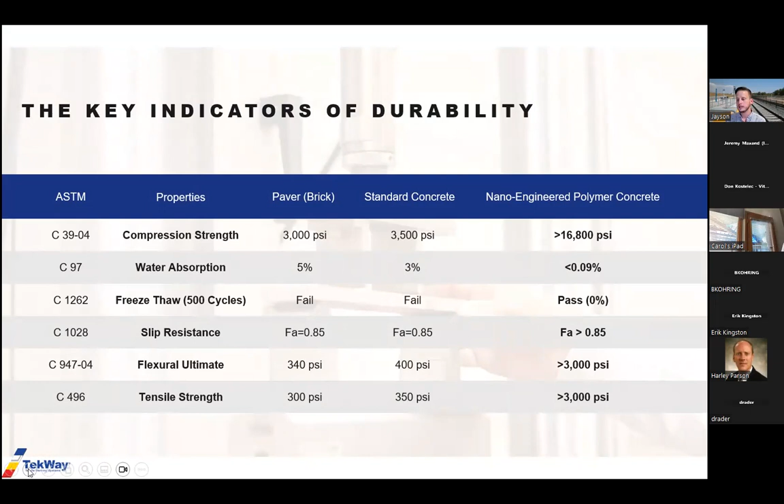This is more of a note to consider when looking at whether this device can survive these different elements. You want to look at the ASTM test data. That will tell you critical things like compressive strength. Does it have the strength to withstand vehicles and heavy pedestrian traffic? Does it absorb a lot of water? Does it have high slip resistance, and does it have lasting slip resistance? These ASTM data results will tell you that.

Getting to the end here, I know I've got to wrap up pretty quickly, but I just want to end with these last couple of slides that really reiterate: if you're neglecting the functionality of these devices, and this is why I wanted to cover this, you're neglecting safety, and you're basically neglecting signaling to a visually impaired pedestrian of what they need to do.

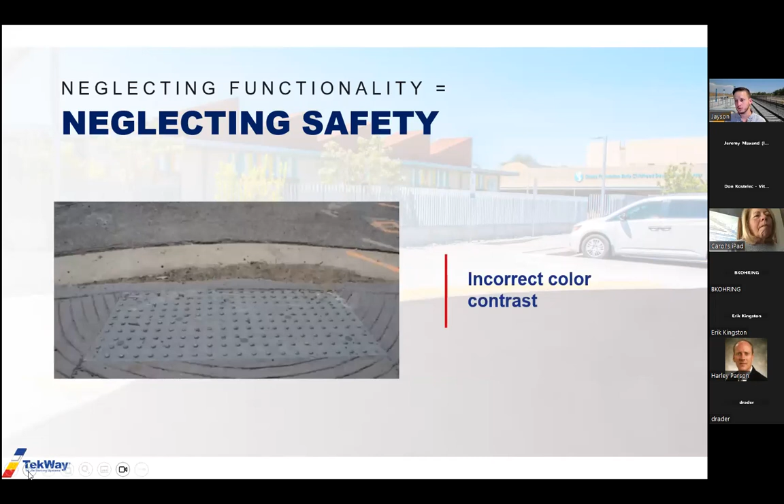So whether that's using the inappropriate device, like the bars as a border instead of a guidance tool, whether you're using inadequate material, like something that can't withstand heavy traffic or weather conditions, using incorrect color contrast, or just inadequate installation, all of those things are a detriment when you're trying to achieve greater accessibility.

In my humble opinion, legal compliance is not enough. Doing the minimum standard when it comes to accessibility is not enough. You need to focus on lasting compliance and better accessibility, because that's what does the right thing for pedestrians who have low to no vision.

Yes, legal compliance you can achieve—it's the minimum local, state, or federal standard. But greater accessibility requires really focusing on the material, the product, and the testing factors behind those products. You're analyzing the ASTM test data we just talked about, best practices, and talking with people who know how these are supposed to be used, like Accessible Design for the Blind, or Don, or anybody familiar with the best practices for these materials.

Once you find these materials and products that give greater accessibility to the project owner and local jurisdiction, you're protecting that product specification. You can do that by using performance specifications. I know 'or equal' is a big thing, but you can at least state that it needs to have this 'or equal,' and it's not equated to doorknobs, nails, or light bulbs at the end of the project. You've set forth the standard that it needs to have a high standard, because this is for this group of people to help them traverse safely. In doing this, you're ensuring reliability to the project owner, your jurisdiction, and the visually impaired within that community.

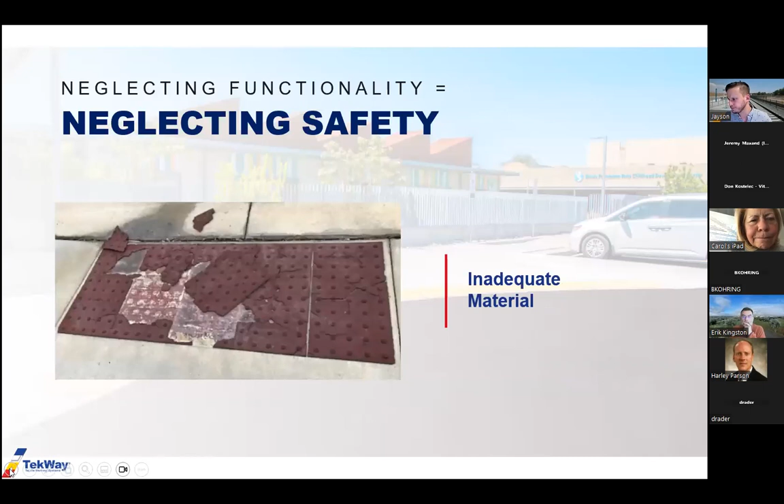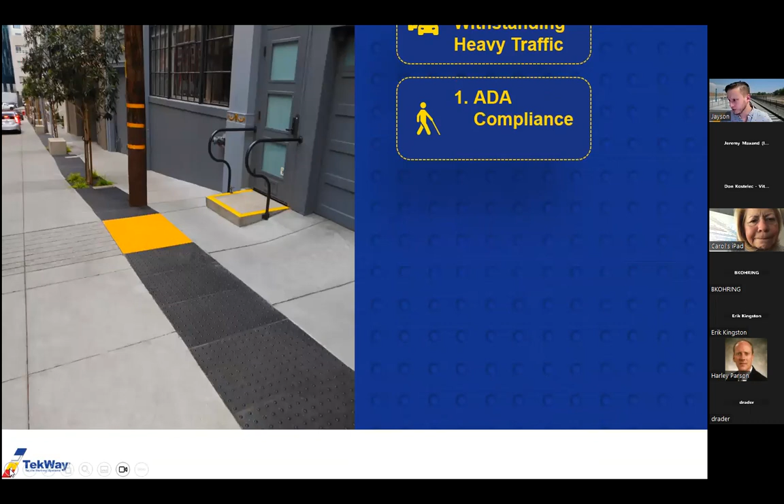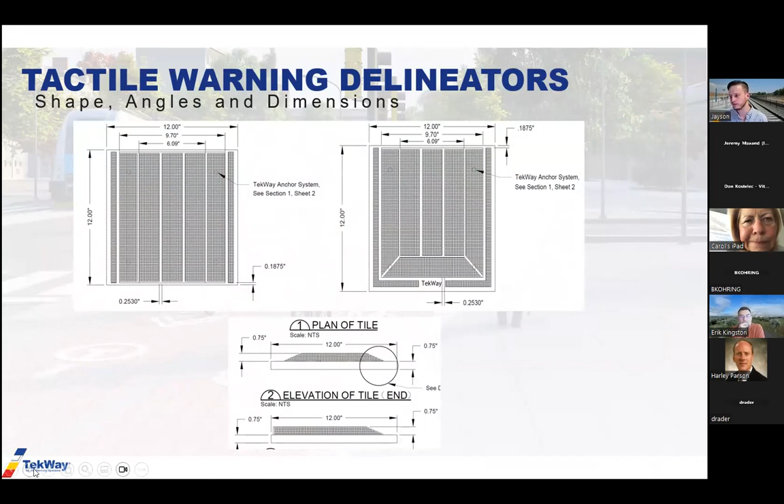Yeah, so that was actually a concern shared by the city and county of San Francisco. You can't see it very well, but what we actually did was leave a little sliver between the trapezoids. You can't really see it here, but there's a little sliver right here meant to be a drainage spot in between the two, but that isn't necessarily adequate if you have a lot of moisture or pooling. So this is why you can space them out a little bit. It doesn't necessarily have to be that wide, but you can space them out to allow for more drainage, depending on the length of whatever your vehicular way is. But as long as there's some part there that you can navigate through and that can be drained, that should be okay. Just space them out a little for drainage.